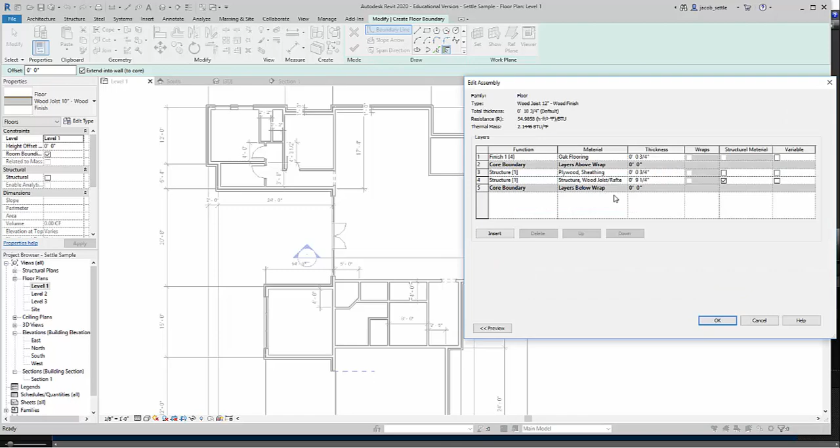And I'm going to go through and edit this one. I'm going to duplicate this to be a 2x12. I'm going to put a 12-inch joist in there. So I'll hit rename that when I duplicated it. And then I want to go into my structure, and I want to change this to 11 1/4.

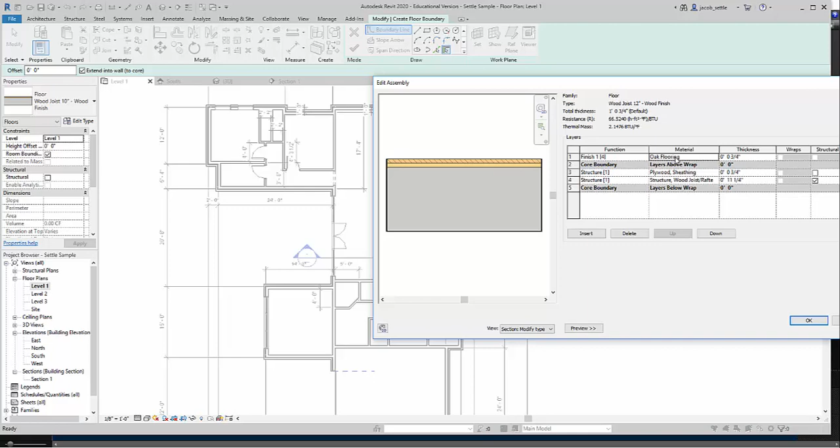And then you have your plywood sheathing, which is your subfloor, and then your finish above that's an oak floor. You want to change this to carpet, you want to change that to some other different kinds of flooring, you can do that, whatever you want. That does need to stay above the core boundary. So hit OK on that, OK again.

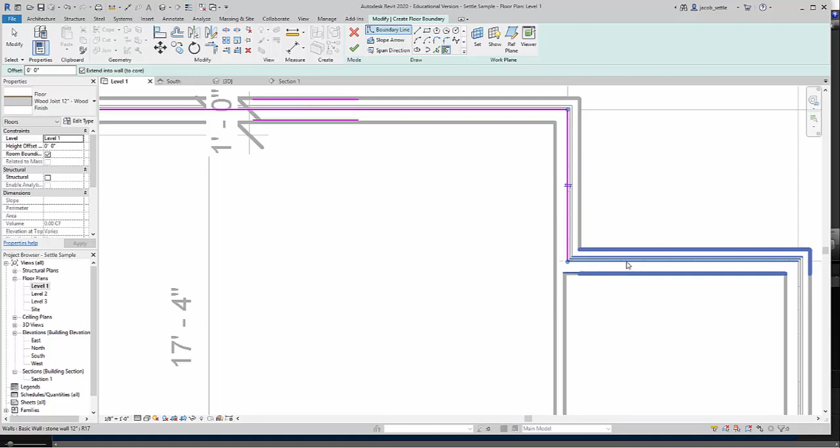And you can draw these. The best option is to pick your walls, and that should be picking into the core. So when I select this, notice it does not go underneath of my stone exterior wall. It is just to that exterior core as we go around our structure here. So we'll go around through here, grab all these exterior walls.

This will get a little tricky in here. We'll have to draw a couple things. That's okay. Again, can't have any overlapping stuff, so we will do our best here as we clean this up a little bit.

Alright, so most of it looks pretty good, except when I get down here around the garage. I'm going to use the trim tool to trim these two pieces of line, so those look good. And then I'm going to trim this over to here. So that gives me that profile around here.

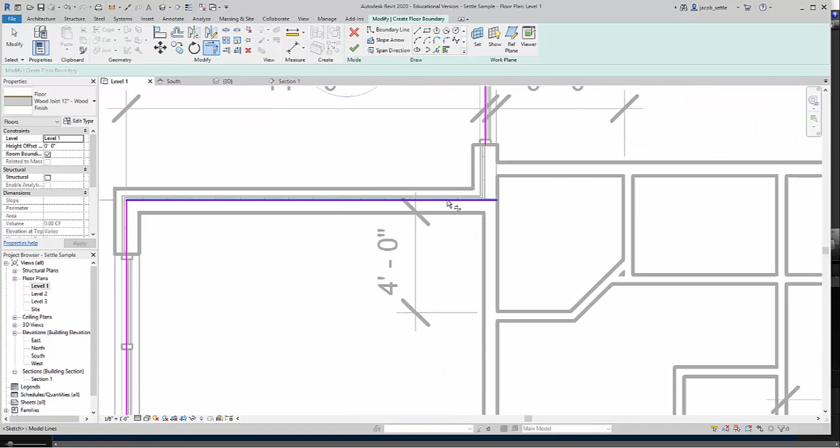And this one looks okay. I'm going to bring that all the way around to there. And I'm going to check that up here as well. I'm going to click these two to get that profile. And then I'm going to hit the check mark there.

Let's see, I got something overlapping. So I got to go back in. I got a gap in there, so I missed one. I'll go back in and click this and see if it likes my profile now.

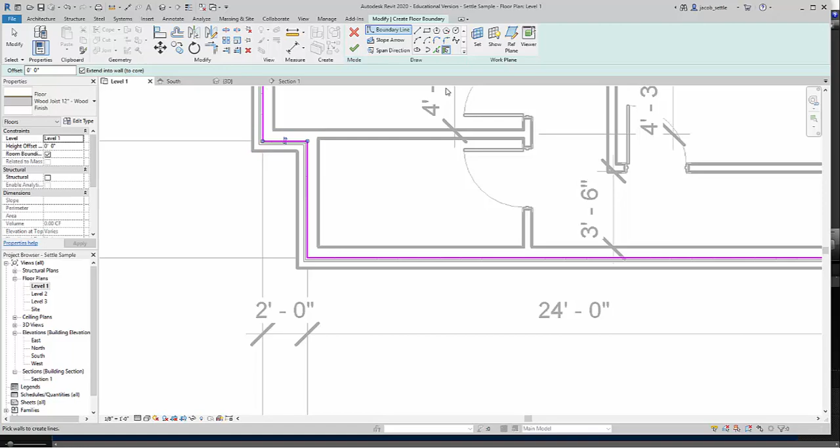So now I got my oak floor in there. You can look in 3D. If you want to change floor types, you'll want to make them in separate pieces. So you could make this, if you're doing oak out here but you're doing carpet in here, make it as two different floors when you do that.

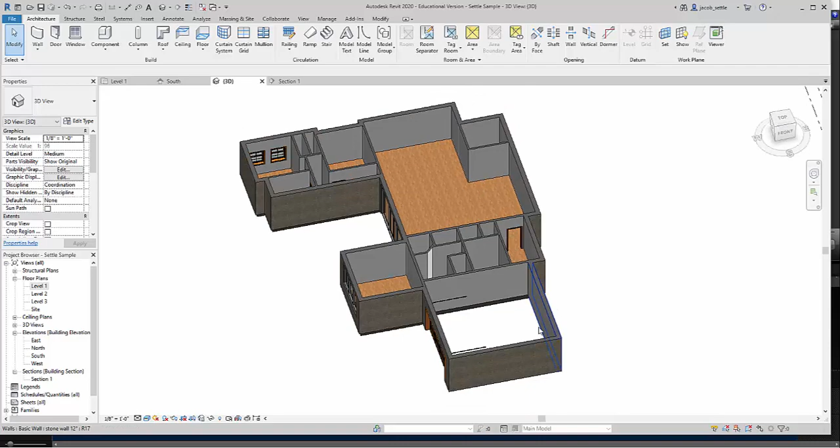So instead of one big continuous sketch, just make sure that garage does not have a floor in it at this point. Now what you're going to notice now is that there is a gap now where your floor system is. We are going to be adding a foundation wall around here in one of our next steps. So that's kind of where we're headed from here.